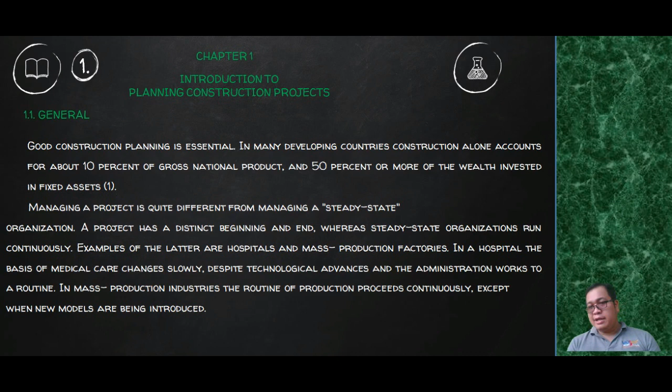What this simply means, class, is that a construction project, even a small project like a residential building, has a beginning and an end. At the beginning, that's when you plan your project and do the plans, and you also have the ending when you turn over the house or the building. But in between, class, as an architect, it is your job to manage the material and human resources involved.

These are the elements included in project management, starting from goals and ending with the end product given in this figure. Project management has planning, executing, and controlling, then goes to an end product. You have here your goals. It is bound by time, since when you do construction projects, you should set a time element. How much time is needed to finish it?

It also requires funding. For example, you're going to build a house. How much will it cost? Then, what are the human and technical resources needed? For example, how many engineers do you need for this project? Foremen, construction workers. Then the end result will be the end product, which is the building or the house.

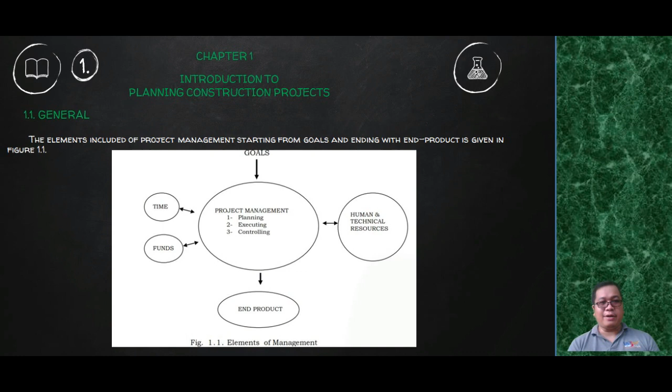In general, the construction industry supplies the basic requirements of shelter, water, sanitation, roads, and hospitals. Therefore, performance of the construction industry has a marked effect both on the economy and on social conditions. This is especially true in developing countries where much of this infrastructure is lacking. It follows that efficient management of construction projects is vital if scarce resources are not to be wasted. Proper construction management should provide the cycle of activities to achieve the project goals.

This statement, class, simply means that in more developed countries, their infrastructure is so developed that their people can benefit from it. In the Philippines, we really need to develop our infrastructure. For example, we need better bridges. Then we need better public transportation systems. This could also help the economy.

For example, what if Mindanao Island had a railroad network or a bullet train connecting Cagayan de Oro to Davao? With such infrastructure, travel from Cagayan de Oro to Davao would just take around 1 to 2 hours instead of 8. It would mean that goods and people can travel faster, so there will be faster economic activity. That's why, class, infrastructure is synonymous with economic activity. That is what is lacking right now here in our country, which is still developing.

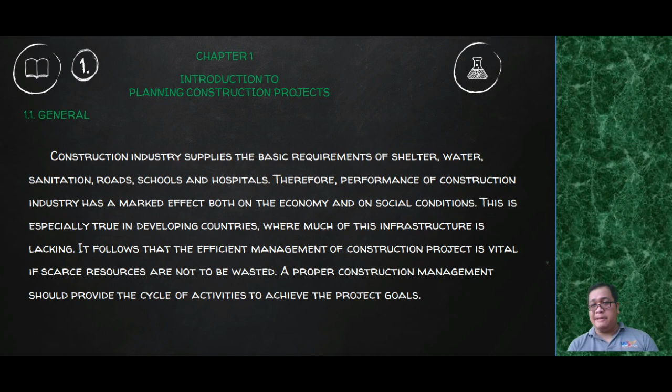So this is the managerial cycle shown in figure 1.2. Some changes, often unforeseen, occur during the lifetime of a project. Figure 1.2 presents a continuous action aimed at achieving the best possible result.

You can see here you have your planning. So in the planning stage, you're going to set the objectives. Then you're going to survey resources. So what does survey resources mean? In smaller projects, class, it means that you're going to know what are the material resources available. Okay, so if you are the contractor, the builder, what resources do you have to implement the project?

And then you're going to form a strategy in the construction. So you don't form the strategy, class, when you're already in the execution part. As early as the planning part, you should already have a strategy. For example, if you have a project within a slope area, you already have a strategy how to build that. Okay?

Then you have the executing. So in execution, you're going to allocate resources. Then you're going to guide the execution, and then you coordinate effort and motivate staff. Okay, class? Motivate staff means that during the construction project, you have to make them see the benefits of completing it. Because one of the problems during execution, especially in construction projects, is that when the people see that it's coming to an end, they don't feel secure with their job, because a construction project has a beginning and an end.

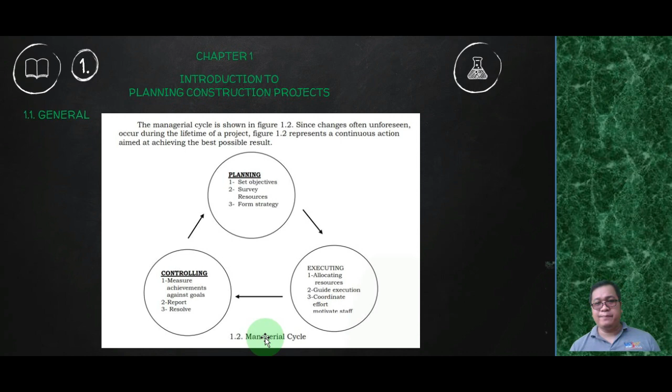Then you also have to measure achievements against goals. That's the only way that you can learn from project to project. What you learn from one project, you're going to apply to the next until such time that you have already perfected your own system. Okay, so

About the parties of the construction project. The main parties involved in a construction project are: 1, the client; 2, the users; 3, the designers. For designers, you have the architect, the structural engineer, the survey engineer, geodetic engineer. You have the professional electrical engineer, professional mechanical engineer, the sanitation engineer, and the professional electronics and communications engineer.

Then you have the executors. The executors would be your contractor, or it could be you engaging in design build service. Then you have the public authorities and agencies. The link between them is often provided by a project management team created for the duration of the project. The team is normally headed by a project manager who is responsible to the client for the execution of the project. The project management team is shown in figure 1.3, which we will discuss later on.

Okay, so 1.2.1, the client. The client may be an individual, such as someone wishing to build a house. The word is more generally used for the organization which needs the end product and has the authority and the money to order and approve it. For government projects, the client is usually a ministry or a department.

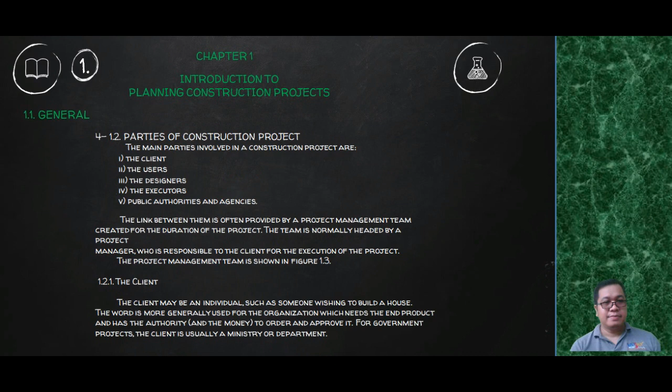Okay, so this is figure 1.3, class. You have here the management team, and they're going to discuss with the client. Then at the back of the client, you have the public authorities or agencies. Then during the project cycle, you have the briefing, designing, tendering, constructing, and commissioning. We will discuss those later on.

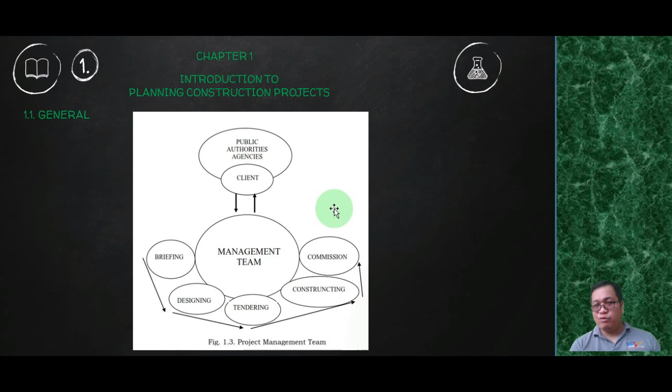Another is the users. In many respects, the users are the most important party, yet often they are the most neglected. They are the people who must operate and maintain the facilities which have been provided. Although the same organization may be both the client and the user, the individuals involved may be different.

Okay? So, for example, class, when you construct a school building, who are the users? It could be the professors, the teachers, the instructors, and the students also. Okay? Then the client would be the president of the school, for example.

Okay? Then you have the designers. So these are the architects and specialists responsible for translating the client's requirements into reality. So in a building project, the architect works with the following people. You're going to work with the structural engineers in the design of the structure. Then you have draftsmen to produce the working drawings from the sketches.

Then you have the electrical engineers in the design of power and lighting supplies. You have the civil engineers in the design of access roads and earthworks. You have water supply and quantity surveyors in the preparation of estimates and tender documents. Then class, here in the Philippines, you have your professional electrical engineer, your professional mechanical engineer, your professional electronics and communications engineer. Then you also have your sanitation engineer or your master plumber.

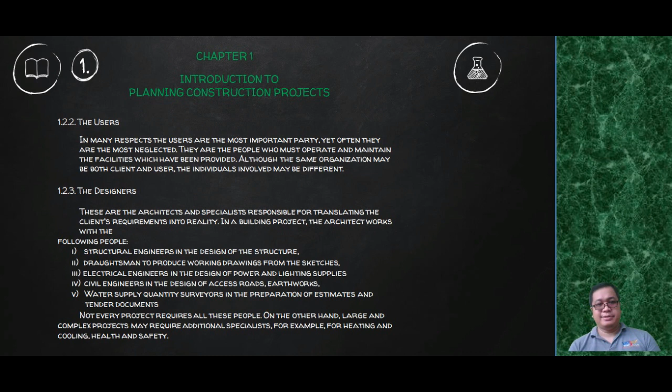Then you also have the executors. So these are the people who undertake the physical construction, who in many cases will be the private contractors. Some ministries have their own labor forces, and work carried out in this way is said to be done by direct labor or force account. For simplicity, the word contractor is used and is deemed to include all organizations which actually build.

Okay, then you have your public authorities and agencies. So all buildings must fulfill statutory requirements regarding construction standards and safety. For example, the roofs must be able to withstand specified wind loadings, and fire regulations must be observed. So the health and safety of people who work or dwell in a building are usually safeguarded by legal regulations, so they must have a substantial effect on the shape of the building and the facilities provided.

When you go to your higher year levels, I think you're going to learn about building laws. I'm not so sure if I'm handling you guys. Maybe you have a different instructor, but in building laws, you discuss PD 1096, which is the National Building Code. You discuss PD 957, the Condominium Subdivision Law. Then you're going to discuss BP 220, the Socialized and Economic Housing. Then you're going to discuss PD 1216, the Open Spaces Act.

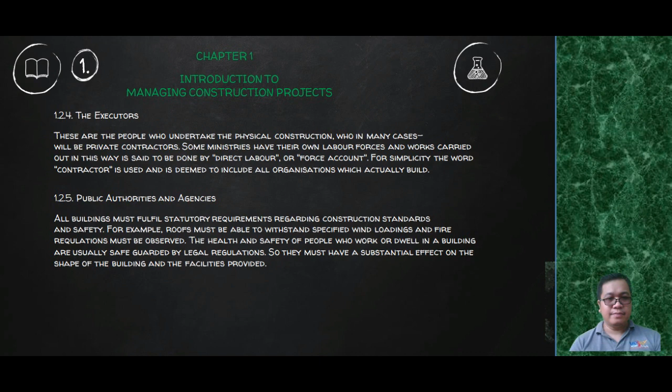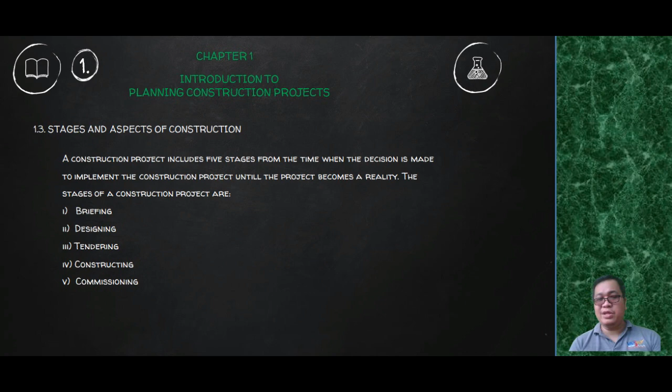So these are the stages and aspects of construction. A construction project includes 5 stages from the time when the decision is made to implement the construction of the project until the project becomes a reality. So the stages of a construction project are: first, the briefing; 2nd, the designing; 3rd, the tendering; 4th, the constructing; and 5th, the commissioning. So we're going to discuss these stages one by one later on.

So let's go to the briefing stage. The purpose of the briefing stage is to enable the client to specify project functions and permissible costs, so that the architects and engineers, quantity surveyors, and other members of the design team can correctly interpret his wishes and provide cost estimates. Then what are the activities? One is to set up a work plan and appoint designers and specialists.

2. Consider user requirements, locations, and site conditions, planning, designing, estimated cost, quality requirements. Then ensure the preparation of sketches at the scale of 1:100, 1:1000, or 1:3500 depending on the project. Then you have the cost estimates and implications. Then you have a plan for implementation, then the department data program.

So the participants are the architect, the structural, electrical, and mechanical engineers, the quantity surveyor, the specialists such as health or school planner, and user representatives.

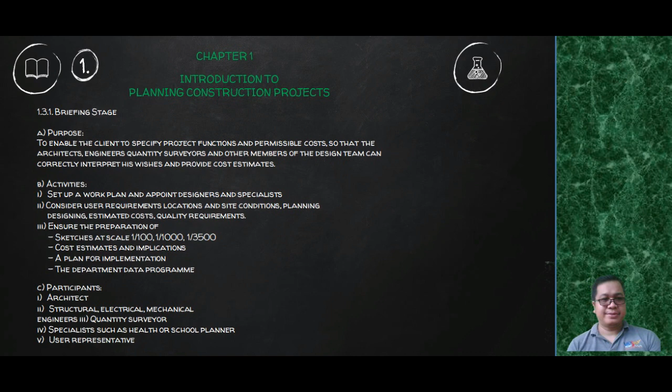Next, class, is the designing stage. Its purpose is to complete the project brief and determine the layout, design, methods of construction, and estimate costs, in order to obtain the necessary approvals from the client and authorities involved; to prepare the necessary production information including working drawings and specifications; and to complete all arrangements for obtaining tenders.

The activities at this stage include the development of the project brief to final completion, investigation of the technical problems, and obtaining the client's final approval of the brief. This is important, class: you obtain the approval of the client since he or she or they will be the one financing the undertaking or the project.

We are going to prepare also a scheme design including cost estimates. Then later on, we move to a more detailed design with the working drawings, specifications, and schedules. Then you have your bill of quantities, final cost estimates, and a preliminary production program including time schedule. Then you have the participants. Depending on the nature and complexity of the project, the design team should include the following.

First is the project manager. Then you have the architect. You have the quantity surveyor. If quantity surveyor, class, is a new term for you, they are the ones who will be doing the estimates for the quantities. Then you have the structural, mechanical, electrical engineers, and then some specialists such as health and safety officials, organizational planners, etc.

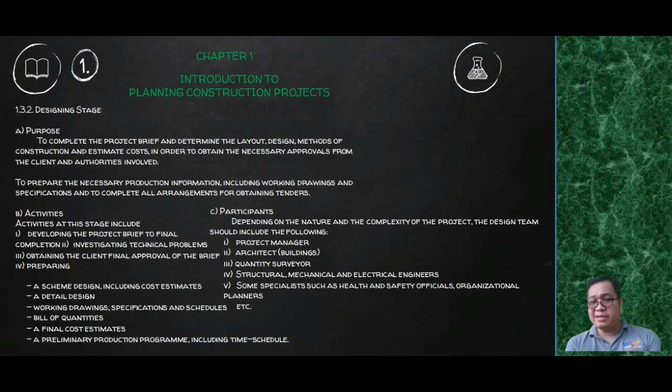Then let's go to the tendering stage. The purpose of the tendering stage is to appoint a contractor or a number of contractors who will undertake the site construction works. It would really depend if there's going to be one general contractor or a series of contractors for the different parts of the structure. The activities are to obtain tenders from contractors for the construction of the building and to award the contract.

Government tendering procedures are particularly closely controlled to ensure that national contracts are awarded in an equitable and uniform way. In many cases, tendering is the responsibility of a central tendering board, which is independent of either the client or the executing agency. Members of the project management team may be required to provide the basic documentation to the central tendering board and generally to provide technical assistance.

Okay, so what is pre-qualification? To increase the probability that the client will get what is required, it is usual to introduce some procedure to ensure that only experienced and competent contractors are allowed to tender. This procedure is known as pre-qualification. It involves an investigation of the potential contractor's financial, managerial, and physical resources, his experience of similar projects, and an assessment of the firm's integrity.

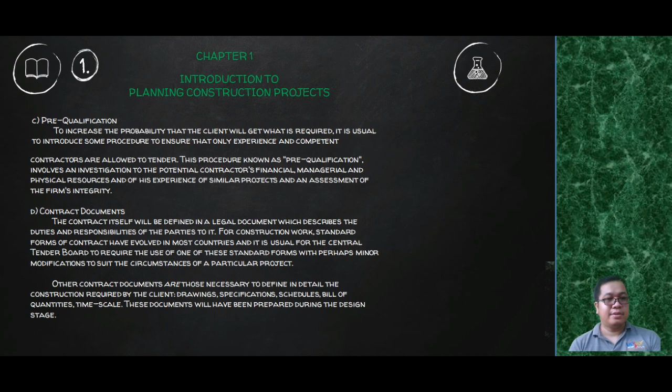Then let's go to the standard forms of contract. The use of standard forms of contract is recommended because: 1. The contents will be well known and understood by the parties involved. 2. Their wording embodies much experience in resolving difficulties of interpretation and enforcement. 3. They will usually have been tested in law. 4. The preparation of new forms of contract is expensive and time-consuming.

Okay, so who are the participants? In the case of government projects, the project management teams may be expected to give technical support by: 1. Providing the necessary contract documents. 2. Providing a basis for pre-qualification of tenderers. 3. Checking that the tenders are arithmetically correct and conform to tender requirements.

Government tender boards usually award the contract to the lowest bidder. In the case of private projects, the final choice of contractor rests with the client, acting on the advice of the project management team.

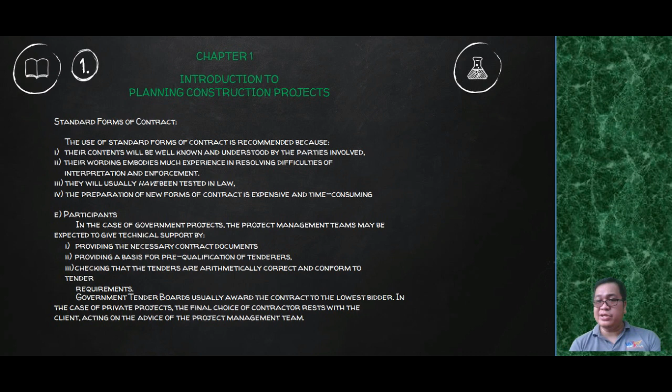Now let's go to the construction stage. The purpose of the construction stage is to construct the structure within the agreed limits of cost and time and to the specified quality.

Okay, class, so someday if you're going to engage in design-build, it is important that it is clear between you and the client how much time is needed to construct the project, how much it will cost, and what are the specified qualities. Okay, that's why, class, this is where your specifications will come in.

So your specifications must be something that is already agreed with the client, so that if the client wants something that is more expensive, you can always refer to the contract documents, which are found in the specifications. So you can always explain to the client that what is agreed is to use only this product.

The activities: this is to plan, coordinate, and control site operations. Production planning includes the formulation of the time schedules, the site organization, manpower plan, plant and equipment plan, then a materials delivery plan. So when you say the time schedules, that's what are the working hours.

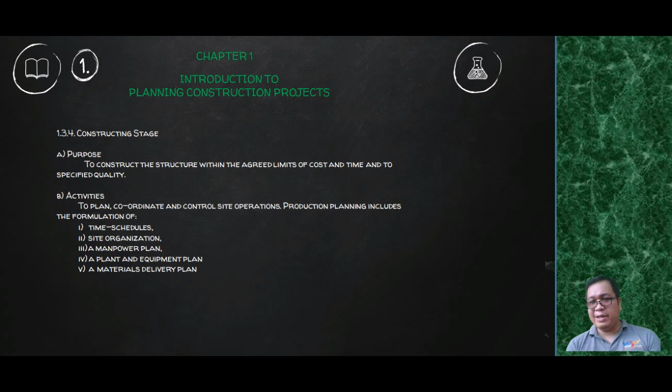Then you also have site operations, which include all temporary and permanent construction works and the supply of all built-in furniture and equipment, the coordination of subcontractors, the general supervision. So the construction stage consists of a number of interrelated activities. The failure of one activity can disrupt the entire production schedule. Therefore, careful production planning is important.

We have the participants. The main participants are the project management team and the contractor. Normally, the direct responsibility rests with the contractor. So the project manager and his team must arrange for adequate supervision of work to ensure that the requirements are met.

So what are the temporary and permanent construction works, class, for a small residential building, for example? So you're going to need temporary toilet facilities for the workers. Then you're going to need temporary facilities for the storage and handling of materials.

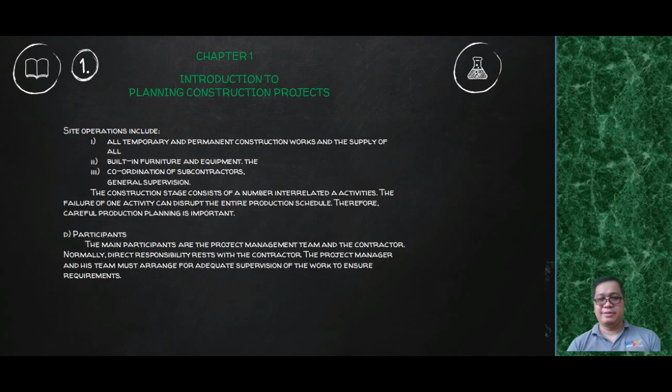Then we're going to go into the commissioning stage. So the purpose of the commissioning stage is to ensure that the building has been completed as specified in the contract documents, that all the facilities work properly, to provide a record of the actual construction together with operating instructions, then to train staff in the use of the facilities provided.

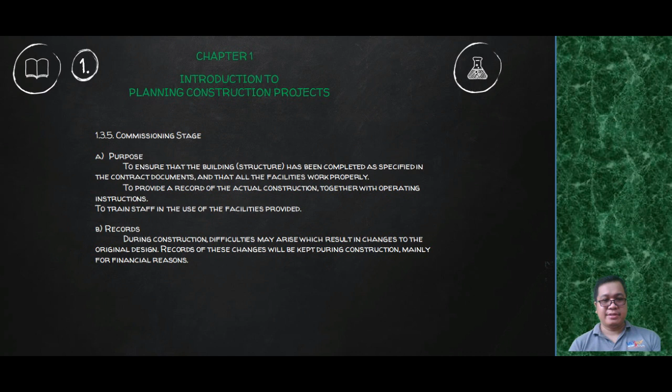So records: during construction, difficulties may arise, which result in changes to the original design. Records of these changes will be kept during construction, mainly for financial reasons. So the activities: you're going to prepare as-built records or as-built plans. Then inspect the construction thoroughly and have defects remedied. Then start up, test, and adjust all services. You're going to prepare operating instructions and maintenance manuals.

Then the commissioning stage is the transition period between the construction, the occupancy, and the use of the building or the structure. And the participants here, class, are the project management team, the operating staff, the designers and the specification writers, the building services and suppliers staff, and then the contractor.

Okay, so that's it, class, for chapter 1. This is Introduction to Planning Construction Projects.